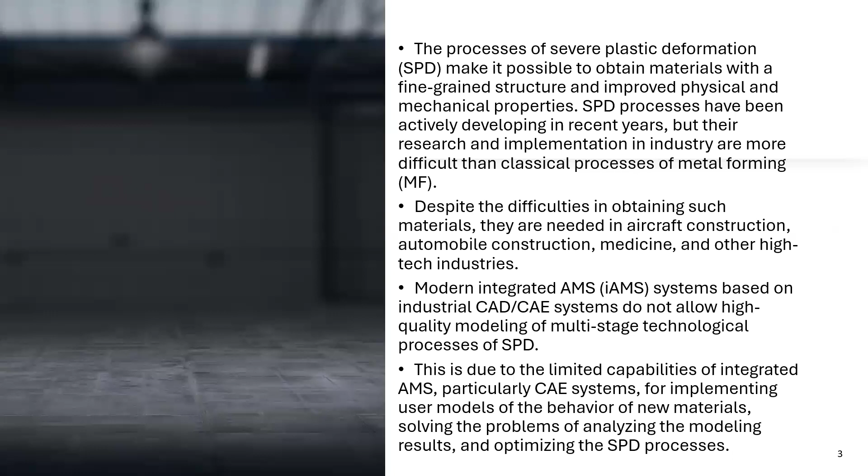Currently, various CAD systems have been developed for the design of individual processes or groups of typical processes of metal forming, which allows to reduce the time for preparing the calculation in the CAE system. For less common SPD processes, such CAD doesn't exist.

When simulating SPD processes, additional problems arise related to the features of the process itself: the need to simulate various variants of billet loading schemes, large plastic deformations, changes in deformation route, thermal mode, etc.

Nowadays, the problems of computational complexity in modeling plastic deformation processes, which are labor-intensive and require significant expenditure of machine time, remain unsolved. The purpose of this research is to improve the quality of integration of CAD-CAE systems and develop the functionality of an integrated automated modeling system based on the creation of an object-oriented core for combining external independent modules that provide flexible and adequate modeling of multi-stage SPD processes using parametric models.

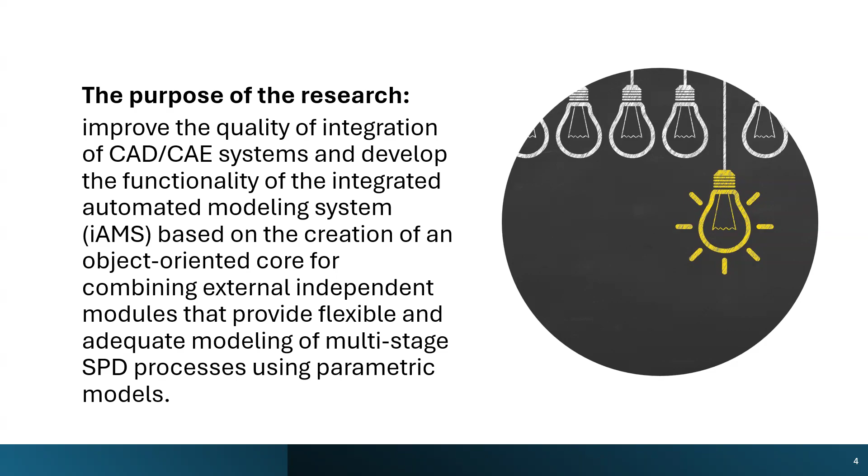To solve several tasks in the design of SPD processes and the development of AMS functionality, it is necessary to develop a core that should provide the possibility of modeling multi-stage combined SPD processes, support the integration of external modules, modern CAD systems, SolidWorks for example, and CAE, Abaqus, QForm for example, for modeling the stress-strain state of the billet during deformation, and provide research into the technological possibilities of new SPD processes based on the parameterization of models of billets and die sets.

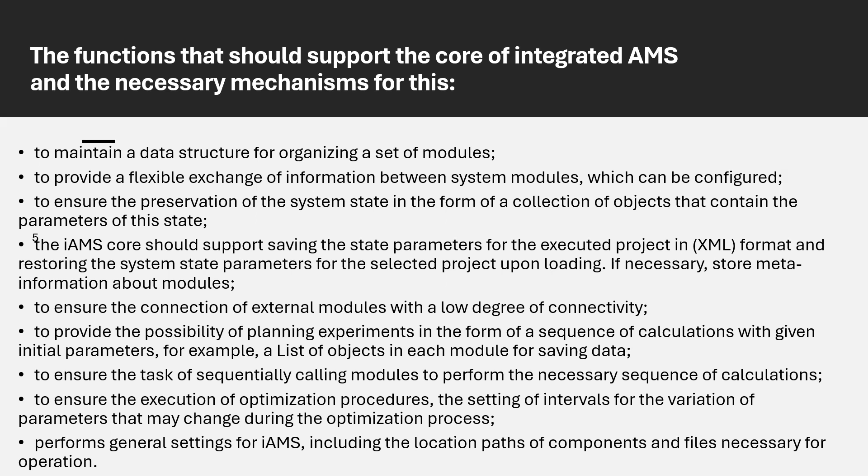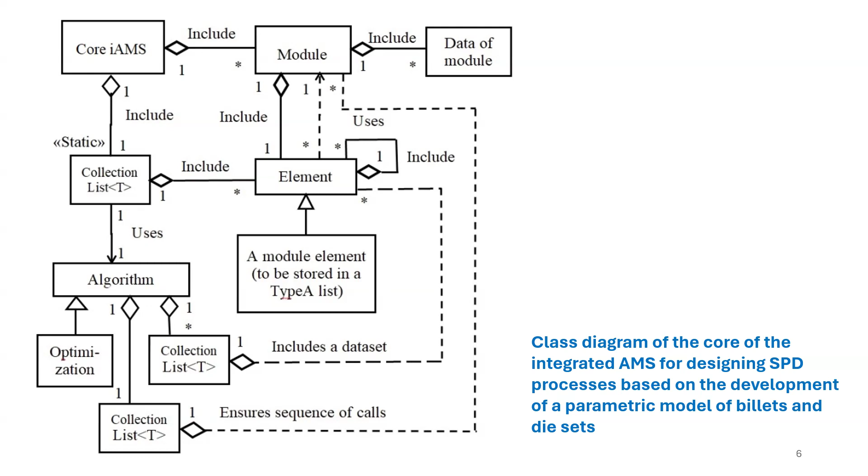Based on the analysis of the capabilities of CAD-CAE systems, we have highlighted the functions that the core of the integrated AMS should support and the necessary mechanisms for this. They are represented in this slide. The class diagram of the integrated AMS core is shown in this figure, which presents the connections between classes of the core, which provides integration with functional modules of the design system.

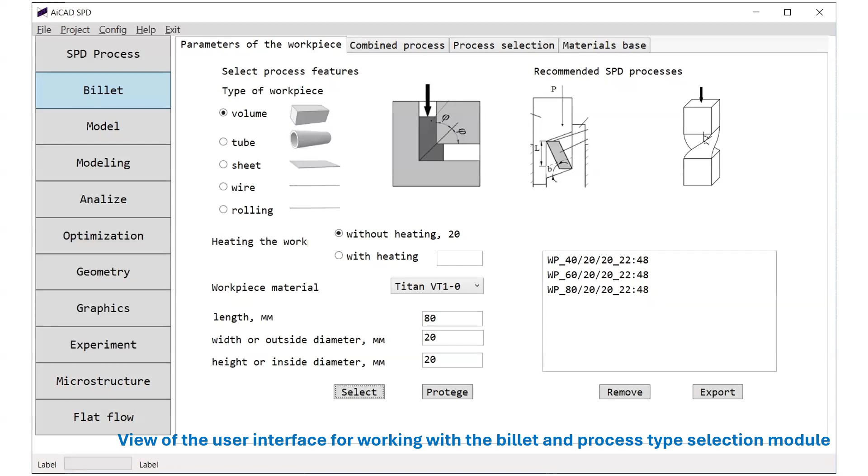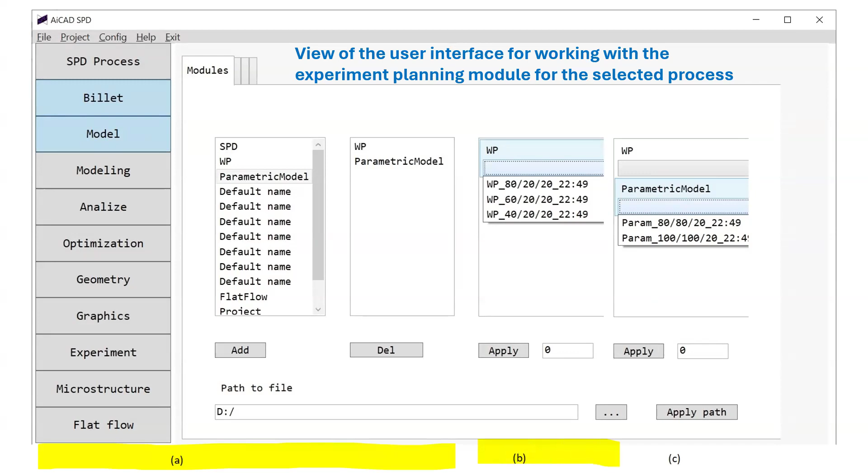An important issue in conducting research is the planning of experiments. To plan experiments on the modeling of SPD processes, it is necessary to create a list of objects that contain variants of the task, for example, several billets with different sizes, a parametric model of equipment, etc. Then, to study a specific technological process, a sequence of work with various models is established. These models are selected from the general list. This list is subject to change. A display of the pre-created list of workpieces and equipment is provided.

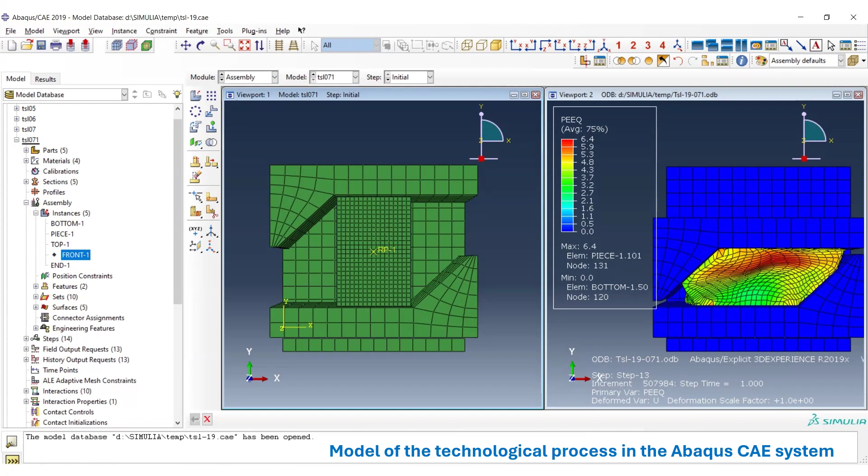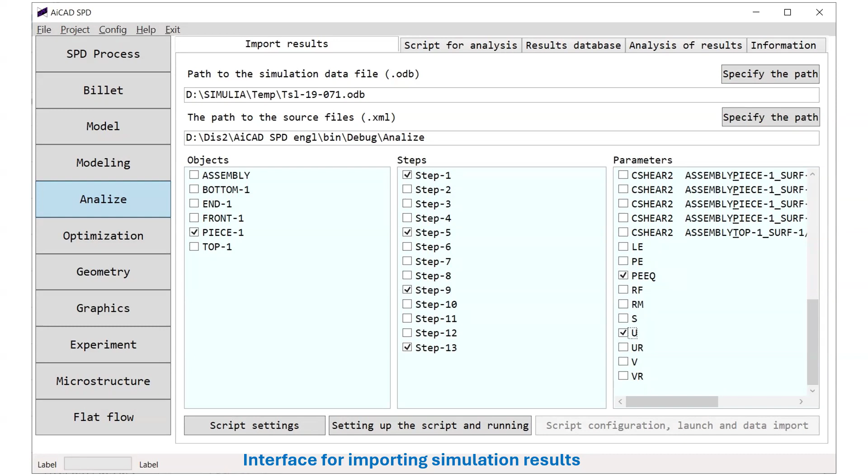To simulate the selected technological process, the model is automatically built for the Abaqus CAE system. The modeling module launches each model from the experiment plan to perform calculations. The import of simulation results is implemented in the analysis module. A Python script is used to connect to the Abaqus post processor. The researcher could choose the values he needs for future analysis of the technological process.

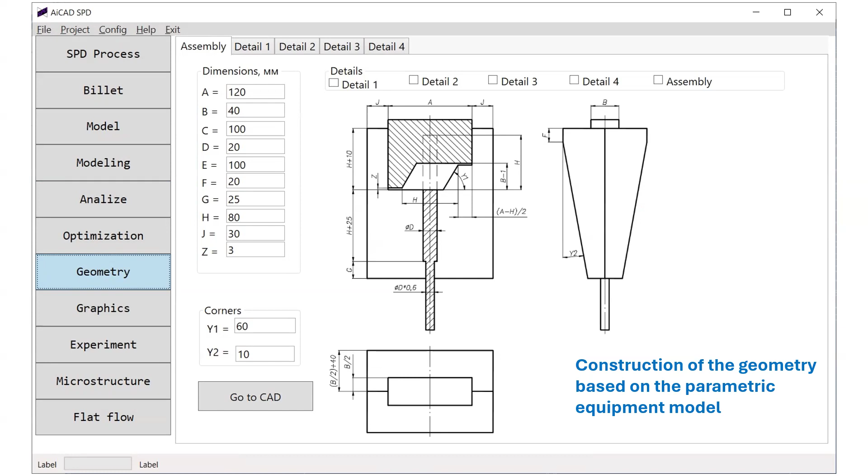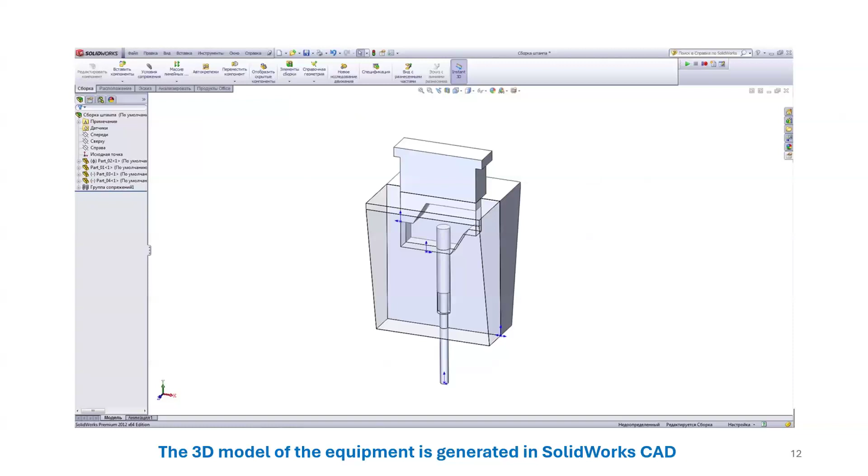As a result of the simulation cycle, one of the technological process options is selected. The interface of the geometry module displays the parametric model of the selected technological process and allows you to make changes to the dimensions. Clicking on the Go to CAD button leads to the transfer of a 3D geometric model to the SolidWorks CAD system. Interaction with SolidWorks CAD is implemented using the SolidWorks API.

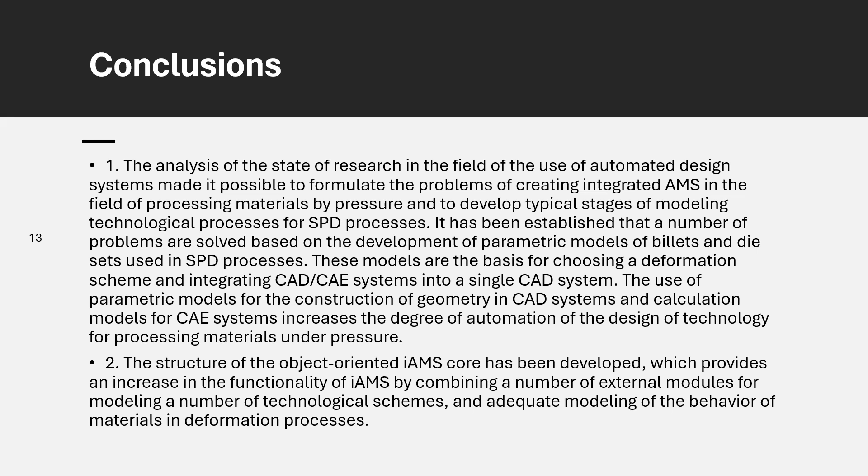So, our research is focused on the development of the structure of the core of the integrated automated modeling system. The AMS ensures an increase in the functionality of the CAD and CAE systems by combining them with several external independent modules. The AMS models technological schemes of several plastic deformation processes and the behavior of materials in deformation processes, reducing the cost of choosing the scheme and parameters of the deformation processes.

Object-oriented software was developed to analyze the influence of different initial shapes of the billets and the die sets on the changes in the billet's cross-section during deformation. This software is written in C# using the WPF interface and the page structure of the main application window.

Using parametric models of processes enables automated calculations in CAE systems and the generation of 3D geometric models of die sets in CAD systems. The design of experiments allows automating research of several plastic deformation processes and reduces the cost of studies. Importing and accumulating calculation results in the CAE system made it possible to find the optimal values of the parameters of SPD technological processes.

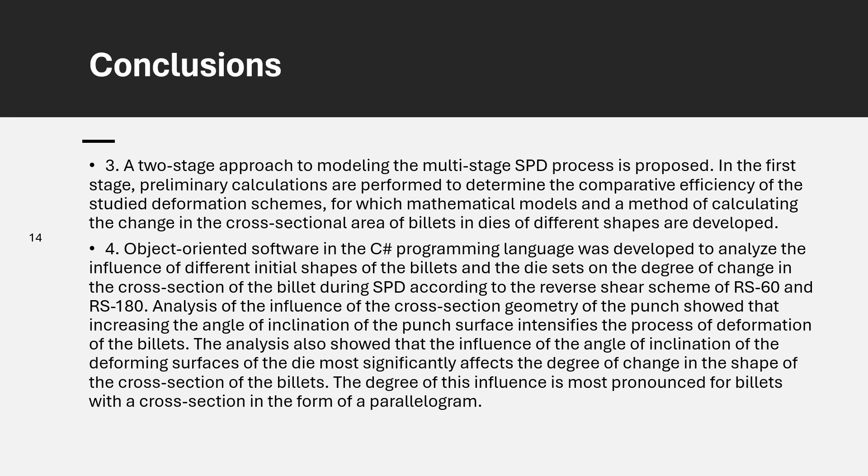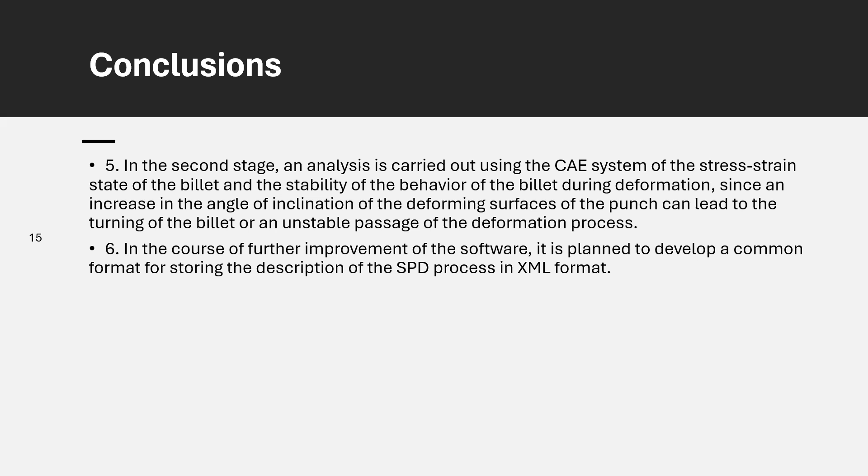The parameters of the deformation models obtained based on modeling are the basis for constructing the geometry of the die set in CAD with subsequent integration with CAE to calculate the stress-strain state in the volume of the billet. Ways to expand software functions to support various SPD processes are proposed.